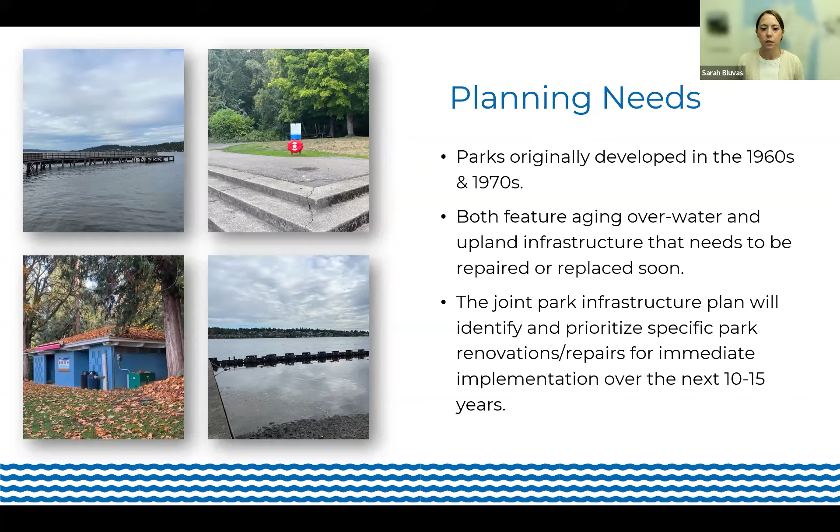The joint infrastructure plan for these waterfront parks will identify and prioritize specific park renovations and repairs to implement over the next 10 to 15 years. The existing park features are nearly 50 years old and showing signs of their age, with multiple structures in need of repair or replacement. In particular, waterfront and in-water structures such as bulkheads, docks, and piers must be repaired or replaced soon. As part of the planning process, we must also bring the existing facilities up to current standards in terms of building codes and accessibility guidelines, as well as environmental permitting requirements, which have changed in many ways since the parks were originally developed.

At this stage of the process, we're excited to present preliminary design concepts for each park to the community. In our two open house videos, Berger will provide an overview of the park's existing conditions, then walk through three concepts for each park. It's important to understand that there's limited funding available for improvements at both parks, so all ideas presented today may not be included in the final infrastructure plan, which is where you come in.

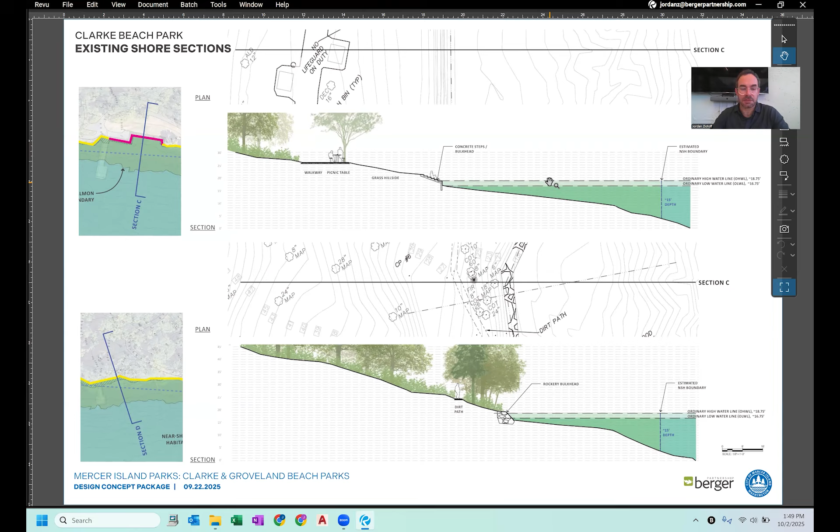Next, we'll walk through 3 design concepts that were developed as options for the park improvements. For each concept, you'll first see an overall plan of the entire park, followed by a closer look at the waterfront area with more detail.

Concepts are generally presented in order from the highest level of change and cost to the lowest, keeping in mind that while this order applies to the overall design approach, some individual features within each option may not follow the same pattern. It's also important to note that funding for this project is limited, so we won't likely be able to include all the ideas you'll see in the final design.

By sharing your thoughts through the survey, you can help the city understand which elements matter the most to you and guide how the available budget is used.

As we go through each concept, we'll highlight the major features, but we encourage you to spend time with the graphics afterwards to explore the details more closely. These materials are available on the Let's Talk website and will be available after this presentation.

Before we dive into the differences between the 3 design options, it's helpful to point out a few elements that are consistent across all of them.

First, all 3 concepts remove the existing concrete bulkheads and sheet pile swimming enclosure. These changes help soften the shoreline, meaning we'd restore a more natural edge to vastly improve fish habitat and overall ecological health. Second, each design reflects a shift in how the park will be used.

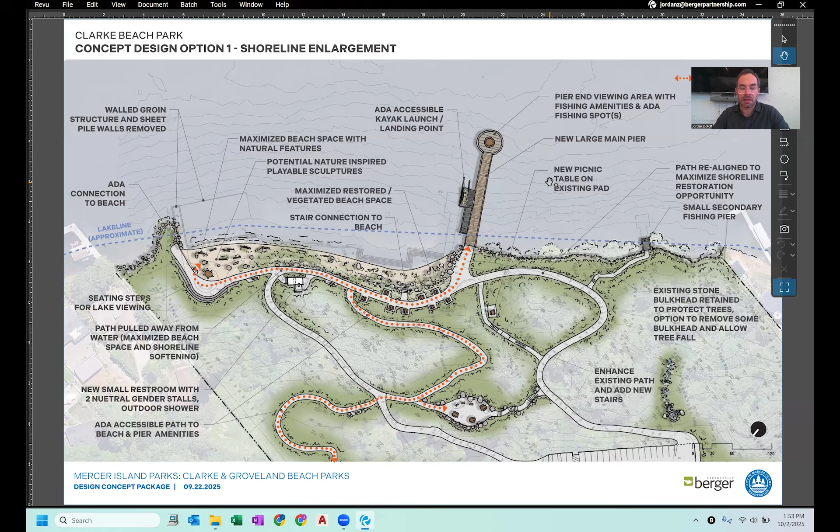At the north end of the beach, new tiered seating creates an informal amphitheater space for additional gathering and lake viewing opportunities. Here you can see,

The remaining beach zone, while smaller, may also be enhanced with natural features that increase ecological function and provide natural play opportunities. Like option 1, the restroom is replaced with a smaller structure with 2 gender-neutral stalls. No rinsing facilities are shown in this option.

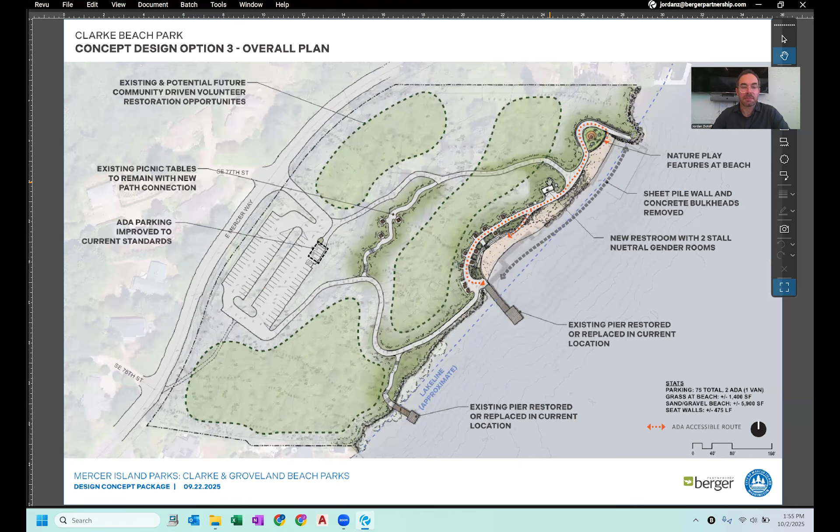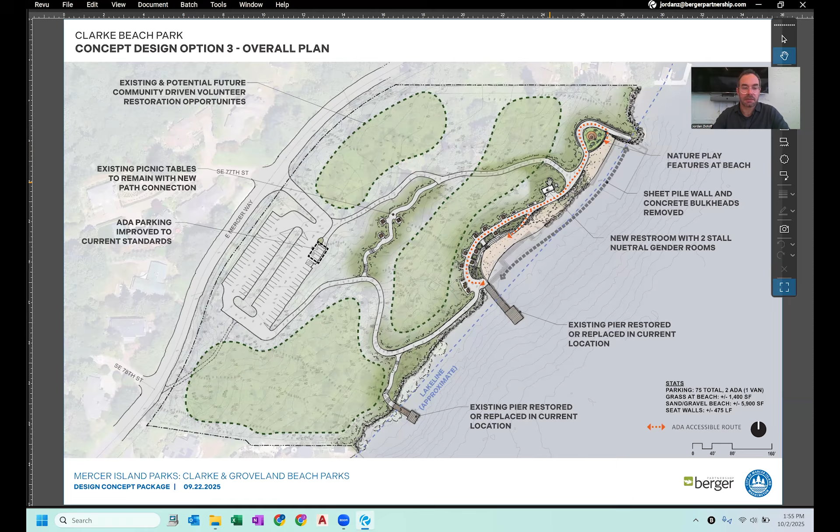Zooming into the shoreline zone of the park, this design concept keeps the existing waterfront walkway location near the restroom. Instead of a flat grass area adjacent to the picnic table zone, option 3 proposes terraced seat walls transitioning directly down to the beach, stabilizing the slope and providing additional seating opportunities.

This option falls in the middle of the 3 in terms of the amount of sandy beach area and proposes fewer natural boulders or log features in favor of a clean sandy beach character. Like option 2, the restroom is replaced with a smaller structure with 2 gender-neutral stalls. No rinsing facilities are shown in this option.

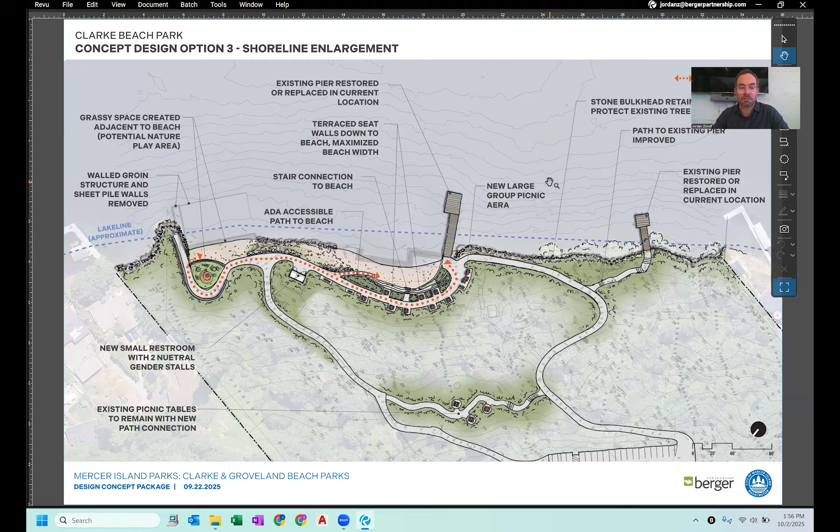This option proposes keeping the existing pier structures in their current size and location with structural repairs and replacement of decking and railings, ensuring they are structurally sound and safe and extending their useful life decades into the future. At the north end of the beach, a long curved seat wall wraps around an open play zone with flexible grass or a small play area with nature-themed play elements.

Next, we see cross-sections for the 3 concepts for the area near the restroom. Design differences here include the location of the restroom and walkway. The options also feature either slopes or stone rockery walls to transition from the walkway down to the beach.

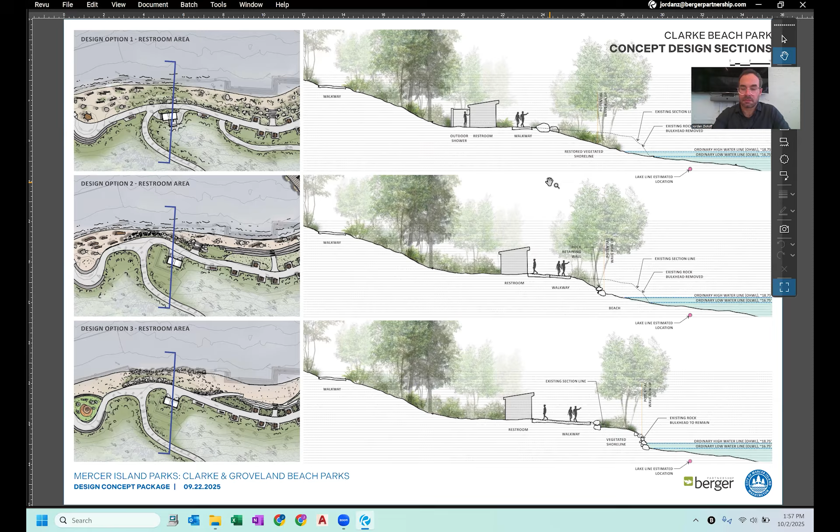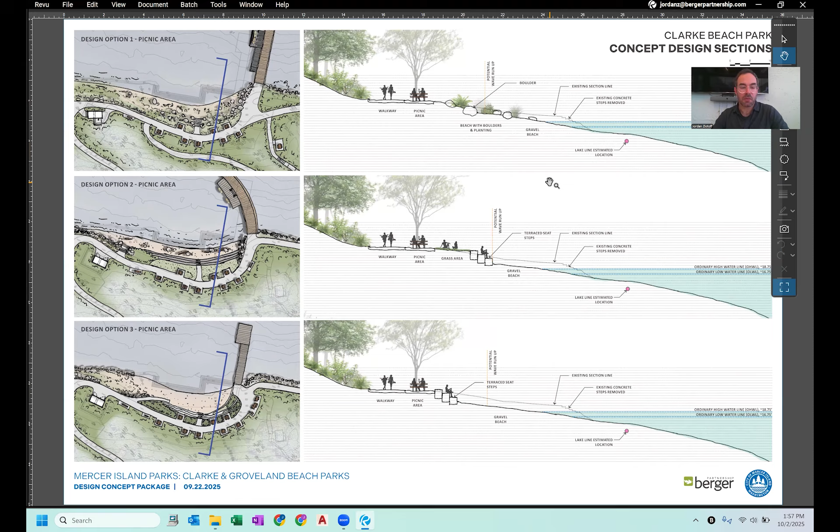In these next few pages are shown images of other park facilities with elements similar to those in the proposed design concepts. These images are intended to help visualize what the new features might look like, although future design efforts will be conducted to determine the specific amenities that will be constructed at Clarke Beach Park.

The first board focuses on pier amenities and non-motorized boat launch options.

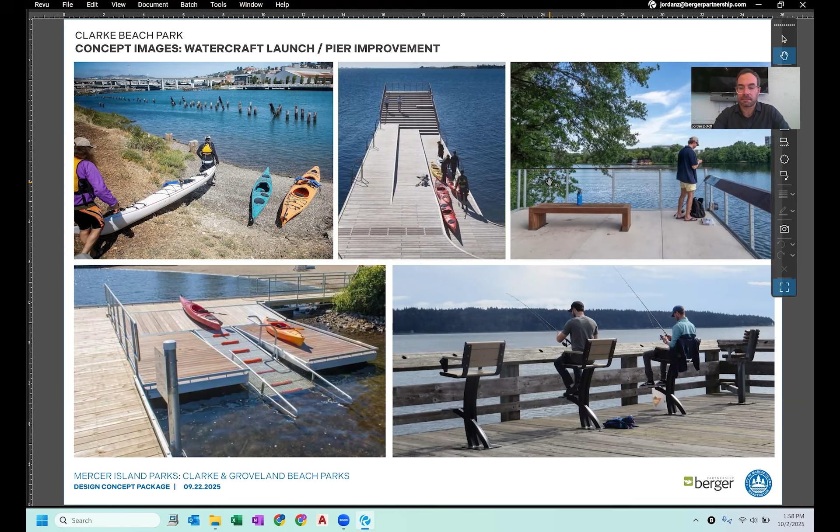This next board depicts waterfront and beach conditions, including some of the natural elements that may be included in the beach area for improved ecological function and fish habitat.

And this is the end of the presentation material for Clarke Beach Park.

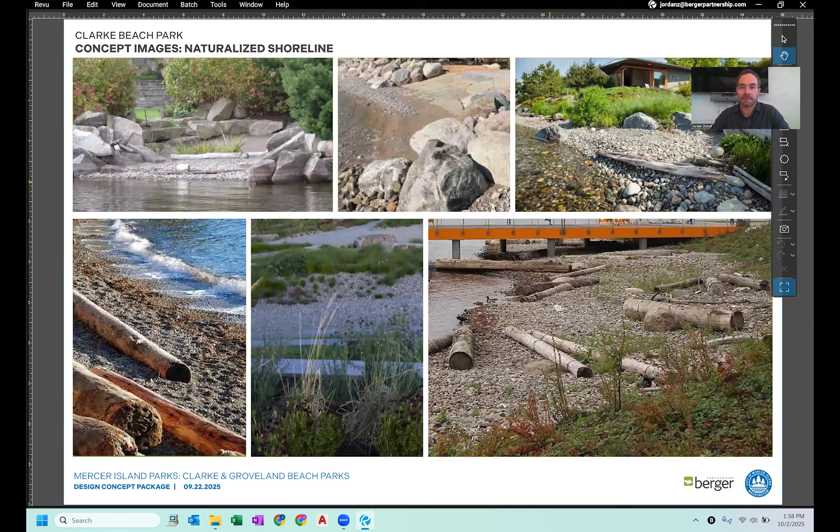Thanks, Jordan. So to recap, during the presentations, Jordan provided an overview of the existing conditions at Clarke and Groveland Beach Parks, and then shared 3 design concepts for each park to consider for the joint infrastructure plan.